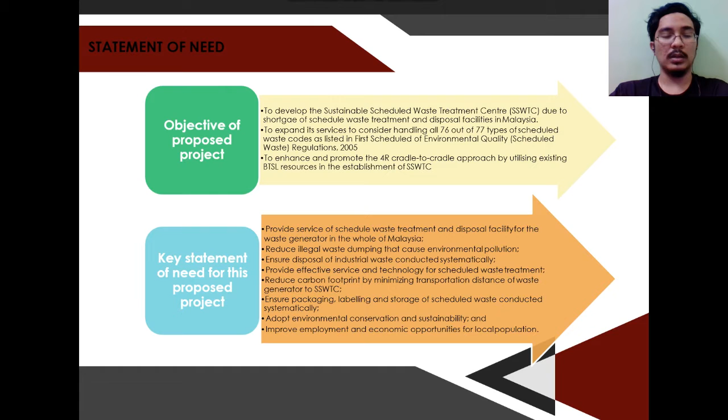And to reduce carbon footprint by minimizing transportation distance from waste generators to SSWTC. Next is to ensure the packaging, labeling, and storage of scheduled waste are conducted systematically. Then it's also to adopt environmental conservation and sustainability. And lastly, to improve the employment and economic opportunities for the local population.

The proposed site for the development of the Sustainable Scheduled Waste Treatment Center, SSWTC, is located at PT 1382 Bukit Tagar Sanitary Landfill, Mukim Sungai Tinggi, District of Hulu Selangor, Selangor Darul Ehsan, with the GPS coordinates of latitude and longitude mentioned in this slide. The aim of the proposed project is in response to the shortage of scheduled waste treatment and disposal facilities in Malaysia.

The proposed project will occupy 40 acres of land within the BTSL, which has a landfill footprint of 700 acres with another 1,000 acres of buffer zone along its boundary. There are several facilities currently in operation within the BTSL premises, such as the leachate treatment plant for the sanitary landfill, Amita Kub-Berjaya Kitar, AKBK, and the Renewable Energy Centre.

The proposed site will consist of a thermal treatment plant and secure landfill, as well as other supporting facilities such as storage facilities, solidification facilities, oil recovery facilities, leachate treatment plant, and surface water treatment plant. This is the location of the proposed site and the existing facilities available within the BTSL boundary.

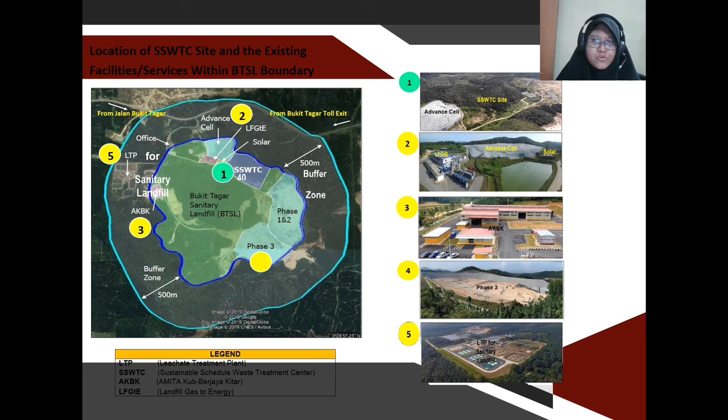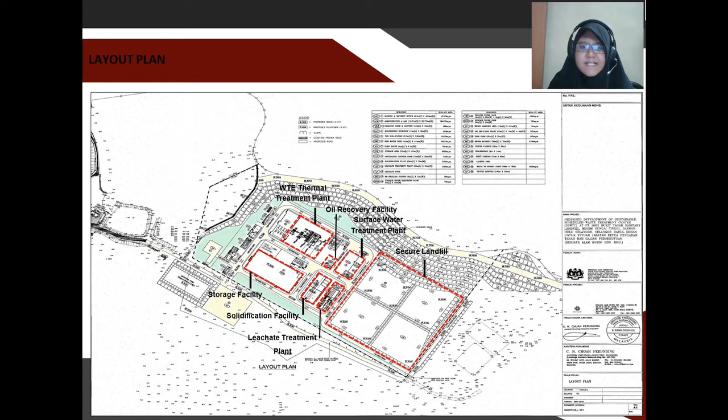Similarly, the Sustainable Resource Centre scheduled waste recycling facility, Amita Kub-Berjaya Kitar (AKBK), is located to the southwest side of the project site. AKBK recycles a total of 15 codes of scheduled waste under the Environmental Quality (Scheduled Wastes) Regulations 2005. This is the layout plan of the proposed project. As you can see, the red line area is the facilities involved in this project.

SSWTC provides the transportation for collecting scheduled waste from the waste generator. The waste will be transported by licensed vehicles registered with the Department of Environment. Upon arrival at the facilities, the scheduled waste is weighed, stored, inspected, and analyzed before it is treated or disposed accordingly. The scheduled waste is assigned to the appropriate treatment and disposal facility based on the waste acceptance criteria (WAC), which take into account waste analysis and waste form.

The WTE thermal treatment process also generates its own waste that needs to be further treated at the other supporting facilities. For example, bottom ash generated from the WTE thermal treatment plant is generally disposed directly into the secure landfill due to its inert characteristic, while fly ash with high heavy metal content is treated at the solidification facility before being disposed into the secure landfill.

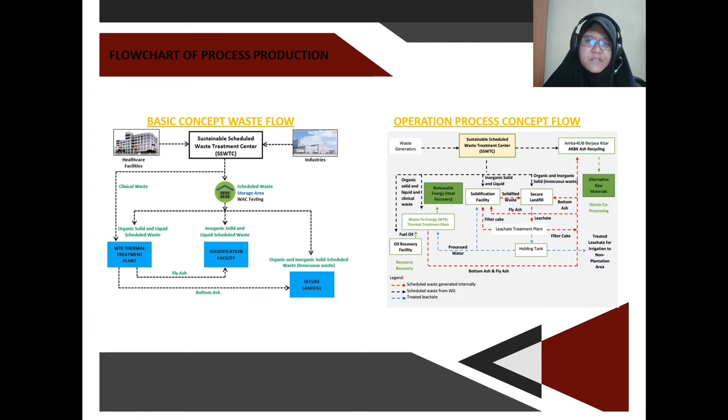As for the project options, there are three options that need to be considered in this project. The first one is the site option, the second one is the technology option, and the third one is the no project option. For the site option, in general, there are four objectives that need to be achieved in the selection of a suitable site: minimize health risk, minimize environmental impact, maximize public acceptability, and minimize cost. In addition, the criteria for site selection considered land use compatibility, logistic requirements, infrastructure needs, buffer requirements, and development and socio-economy.

For the technology option, this project has selected WTE thermal treatment. Generally, WTE thermal treatment is widely used as a process to eliminate hazardous material efficiently and is a viable option to safely treat toxic chemicals. WTE thermal treatment systems for waste can be divided into combustion, gasification, pyrolysis, plasma, and co-combustion.

The no project option is not an acceptable long-term solution, and an alternative scheduled waste treatment and disposal site must be identified for the sake of future scheduled waste management in Peninsular Malaysia. An integrated scheduled waste management facility should be sought as an alternative and to complement the existing facilities available in the country.

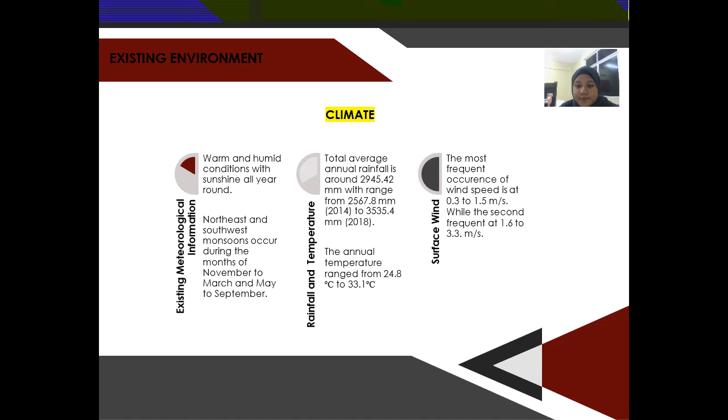Next is the health survey. From the survey, asthma is the most common chronic condition among children at 1.8%, while among adults it is 0.4%, which is acute asthma. Hypertension and diabetes are most common among adults at 8%, and children at 5.7%. There are no cases of lung cancer, the prevalence of infectious disease is very low at less than 0.5%, and no dengue cases were reported. 0.8% of adults presented with a productive cough, and 0.9% of children. Lastly, some children and adults have a fever, at 1.8% and 4.6%.

For social impact assessment, 65% agree on the purpose of SSWTC development from the 79 respondents. They agreed because this project can increase job opportunities for the community and help reduce the unemployment rate among the villagers. It also improves infrastructure and increases community socio-economic development and the local economy.

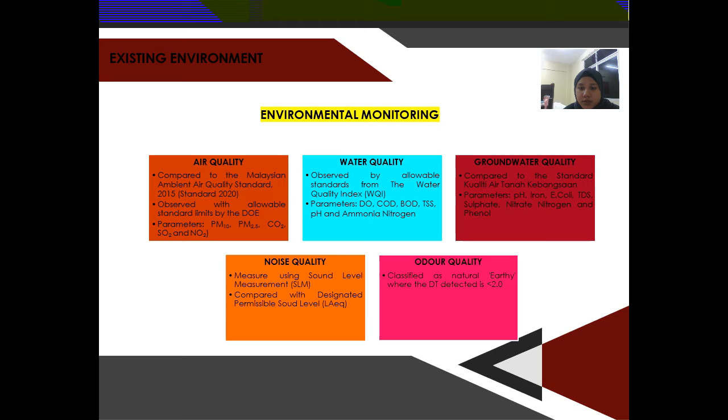Next is noise quality, measured using sound level measurement and compared with the designated permissible sound level. Lastly is odor quality, which is classified as natural earthy, where the detection threshold is less than 2.0.

Next we focus on the baseline information. There are several baseline information for this proposed project. Number one is the ambient air quality, which will be compared with the Malaysian Ambient Air Quality Standard 2015. The parameters studied are PM10, PM2.5, carbon monoxide CO, SO2, NO2, and also O3.

For PM10, PM2.5, CO, SO2, and NO2, these are recorded below the permissible limit, while O3 is not detectable in the area. Next, we move on to water quality.

We will use comparison with the Water Quality Index from the National Water Quality Standard. The parameters studied are dissolved oxygen, chemical oxygen demand, biological oxygen demand, total suspended solid, ammoniacal nitrogen, and pH. The locations for this study are Sungai Nyamuk, Sungai Ayer Hitam, and Sungai Selangor.

We can see the table showing the water quality index result. Based on the 5 locations, two out of the 5, W2 and W4, are categorized as clean, while W1, W3, and W5 are categorized as slightly polluted.

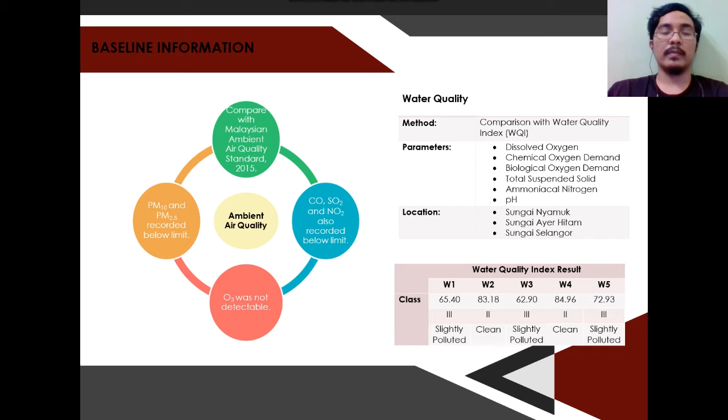Next we move on to groundwater quality. For groundwater quality, we have 4 monitoring stations: GW2, GW10, BHA, and BHB. We will compare it with the Standard Kualiti Air Tanah Kebangsaan, done in order to determine the impact of possible seepage from the SSWTC to the underground.

Next, the noise quality monitoring. The method is we measure for a 24-hour period, conducted over 2 periods: during the day and also the night. There are 2 monitoring stations, inside the proposed project, N1, and at the sensitive receptor, the village, N2.

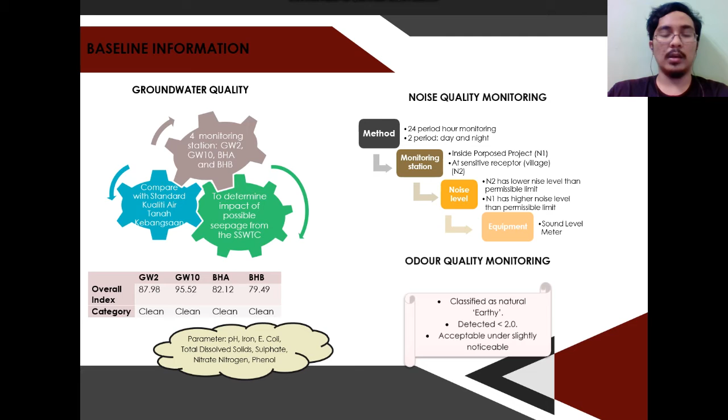The result shows N2 has a lower noise level compared to the permissible limit, while N1 has a higher noise level than the permissible limit. The equipment used is the sound level meter. Lastly is the odor quality monitoring. Based on the study, we classify it as natural earthy, with the detected level below 2.0, which we conclude is acceptable under slightly noticeable.

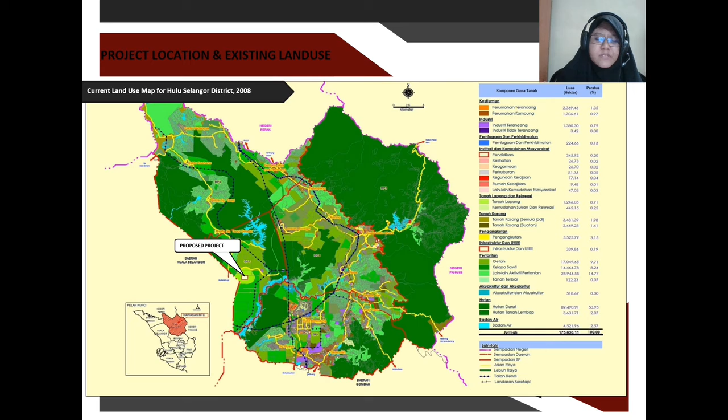The next picture shows the proposed land use map for Hulu Selangor district in 2020. Under the Hulu Selangor District Local Plan 2020, the project site is demarcated for infrastructure and utilities purpose. The surrounding area of BTSL will remain as agriculture with oil palm, with a 500 meter buffer zone.

The proposed project site is located within the lower area, between 5 meter to 150 meter from sea level, according to the study prepared in the Hulu Selangor District Local Plan 2020.

The location of the proposed project site is strategic as it has a 500 meter buffer zone surrounding the existing BTSL site. The buffer zone will act as a shield to minimize the environmental impact that may occur, if any, during construction and operation stage of the proposed project toward the surrounding sensitive receptors. Other than that, there are no sensitive receptors located within 2 km radius from the project site.

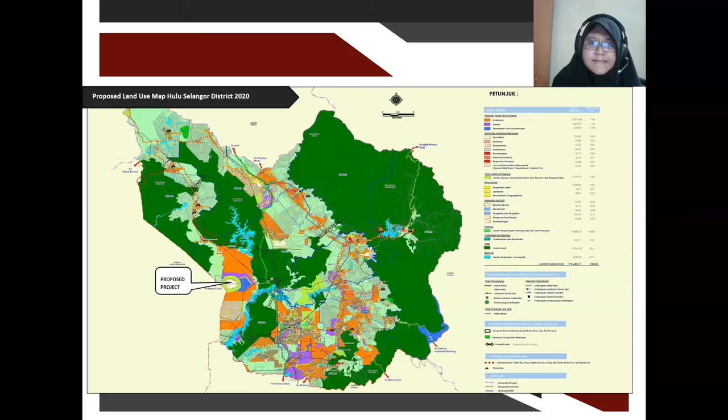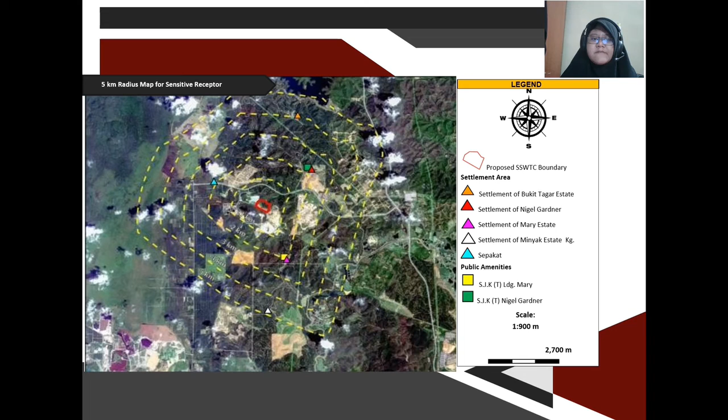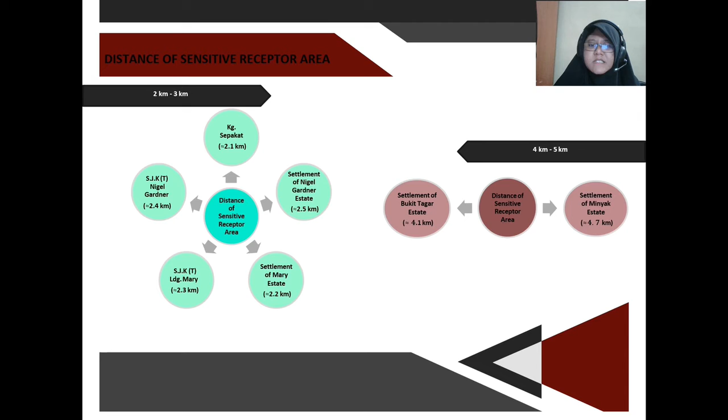However, the distance of sensitive receptor areas for 4 km until 5 km involve 2 settlements, which are the settlement of Bukit Tagar Estate and the settlement of Minyak Estate.

So for this slide, this is the potential significant impact. The first one is the air quality impact assessment, which is the uncontrolled condition where the air is released without going through the air pollution control system. So the impacts are particulates, heavy metals, gases, acid gases such as hydrogen chloride and hydrogen fluoride, and also dioxin furan to the surrounding area, which were evaluated and assessed in this assessment.

Next is waste management. The potential waste generated during the construction and operation phase of this project can be divided into two: solid waste and scheduled waste. The solid waste mainly comes from domestic waste and construction waste. This waste shall be properly stored in a designated place for disposal, and the solid waste will be disposed of in BTSL.

For wastewater quality, the contaminated leachate generated from the secure landfill cell will be channeled to the leachate treatment plant for the removal of organic matter such as BOD, COD, and suspended solids, including heavy metals and ammonium nitrogen.

Next is the health impact assessment, which employs the Environmental Health Risk Assessment (EHRA) approach in estimating the likelihood of potential adverse effects from exposure to environmental hazards.

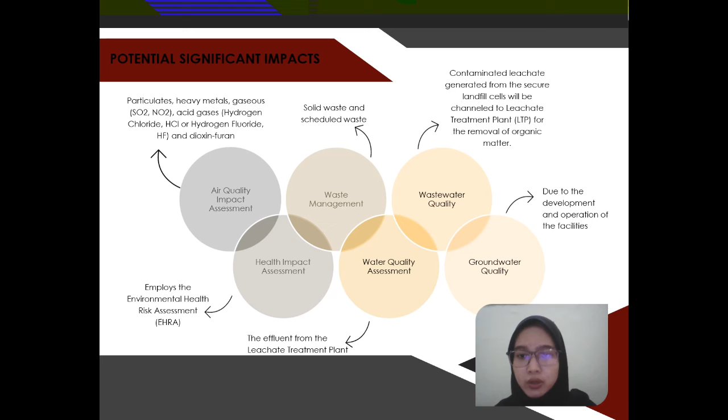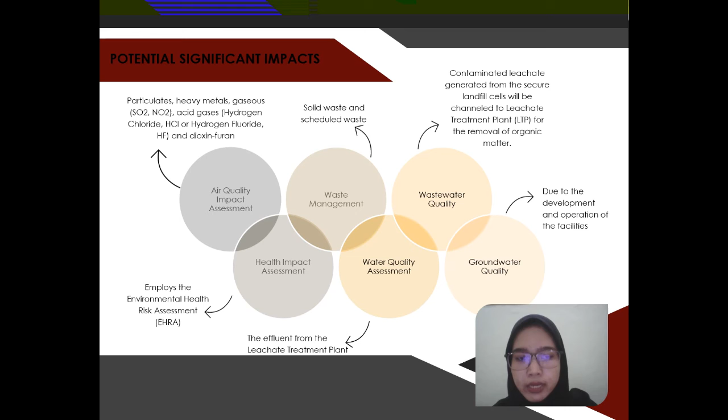For the water quality assessment, the potential impact that might occur is when the effluent from the leachate treatment plant reaches the nearby river. As for groundwater quality, a groundwater study needs to be conducted in this project to determine the potential changes in the groundwater regime due to the development and operation of the facility.

The next slide continues with the potential significant impact. For landform disturbance, it is divided into three: the existing condition before construction; disturbed and uncontrolled during construction with no application of ESCP; and disturbed and controlled during construction with the application of ESCP.

The next one is social impact assessment. There are several potential impacts that have been identified which could impair the surrounding environment and impact community health, including noise annoyance from transport vehicles, unpleasant smell from scheduled waste, water pollution, and dust emission.

As for odor quality, it will produce unpleasant smell from the scheduled waste. It is assessed that the potential odor mainly sourced from the smell of raw leachate at the leachate treatment plant. Two potential specific sources were observed to potentially cause the odor: the equalization tank and the nitrification tank.

The next one is quantitative risk assessment. The major accidents that may occur during the operation phase of this project, with potential for personal injury or fatality, include fire, explosion, and release of dangerous substances from scheduled waste, which is also considered as an event for future evaluation.

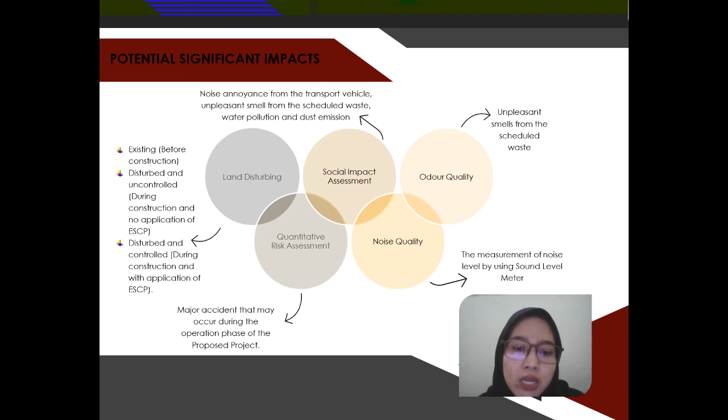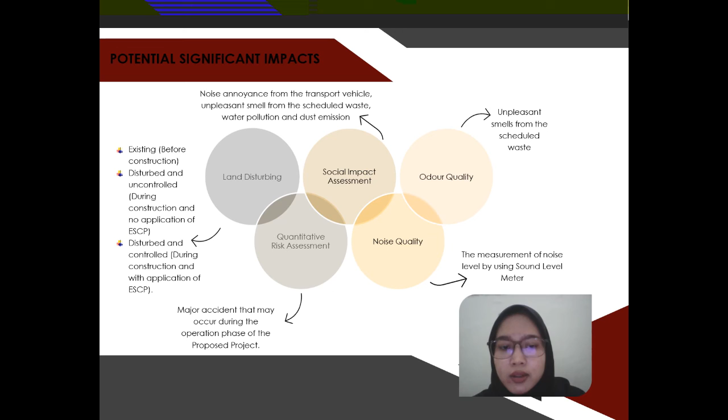And last but not least is the noise quality, which needs to be measured by using a sound level meter to establish the existing background noise level at the project site, which also affects the residential and sensitive areas.

We move on to the mitigation and abatement measures. In this project, there are 9 adverse impacts that will be measured. These mitigation measures are for the potential adverse impacts resulting from the development of SSWTC. Although some of the potential negative impacts may not have a serious impact on the environment, the mitigation measures are still necessary to be implemented in ensuring the effect derived from the implementation of the proposed project would be either minimized or eliminated. The mitigation measures are designed in 2 phases.

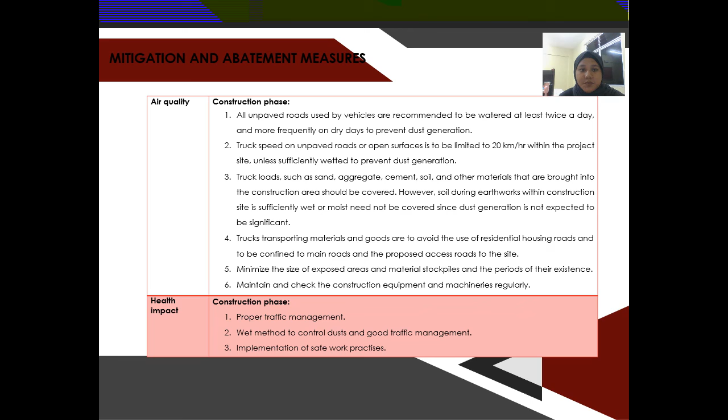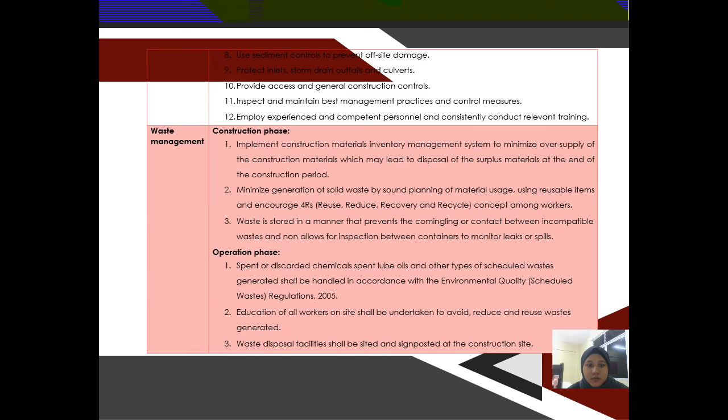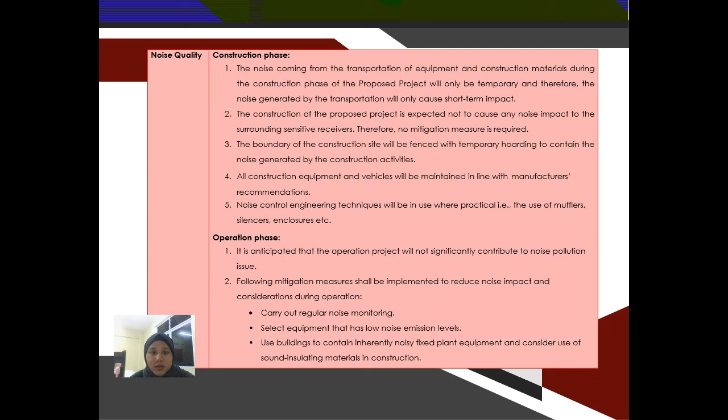Which is construction phase, and operation phase. So this is the mitigation measure for the air quality, health impact, land disturbance, waste management, water quality, groundwater quality, quantitative risk assessment, noise quality, odor quality. Okay, moving on.

We are going to explain the residual impact. So residual impact is the impact that we can get in long-term condition, which is for around maybe 20 to 30 years. So there are 4 impacts that can be seen, which is odor pollution, groundwater pollution, health risk, and noise pollution.

So firstly is the odor pollution. In the long term, the odor pollution is maybe due to the stacking of the waste that will arise. Another odor pollution is also from the transportation of the waste.

Okay, next is the health risk. Some of the waste that is being thrown may not cause immediate effects upon contact, but they will cause effects that may take around 5 to 10 years to be seen, such as cancer.

Okay, next is the groundwater pollution. Leachate penetration may also occur in the long term, maybe due to the lining cover of the landfill, or the disposal site may no longer be able to prevent the leachate penetration, maybe due to corrosion or due to the nearing expiry date.

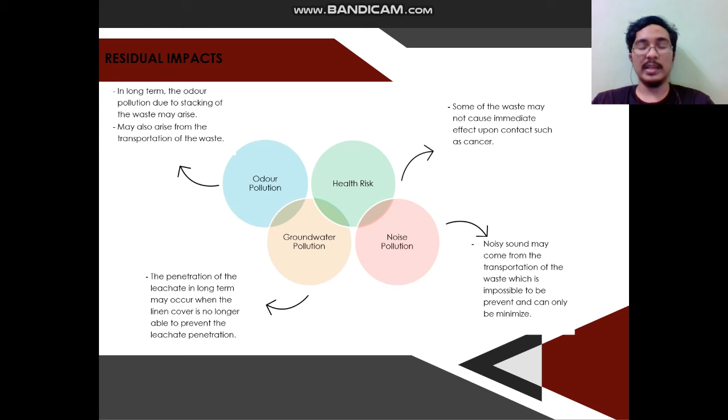The environmental management plan is recommended to be outlined in order to manage all the potential issues identified in the report. EMP is a practical tool for the implementation of mitigation and protective measures identified in the EIA. For performance monitoring, it is a protective and preventive monitoring process to ensure the air pollution control system (APCS) as well as the leachate treatment plant (LTP) are optimally operated and maintained during their operation phase.

For the performance monitoring of the air pollution control system, it is to abate the release of air contaminants into the atmosphere, and also a prerequisite for uninterrupted and efficient operation of the control system. For the performance monitoring of the leachate treatment plant, the leachate generation from a secure landfill varies significantly in its characteristics. Hence, different unit processes and unit operations are utilized to treat them.

For the emergency response plan, it is an essential component of a facility's safety and loss strategy, providing an organized structure for a chain of action to be put into motion in the event of an emergency at the site.